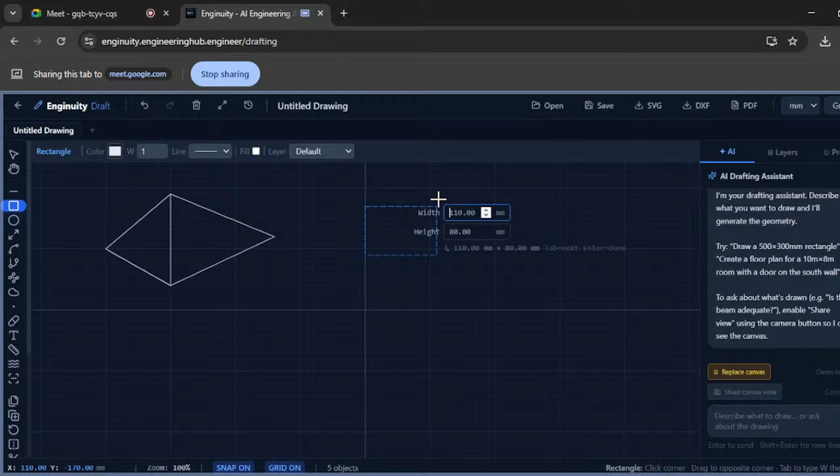This is the line tool in action. Okay, then let us try the rectangle tool. Then we can try the circle. Now, with this, you can come up with anything you want to draw. You can draw a column, a mechanical tool, anything that you want to draw.

Now, we are going to test the AI on this other side. Another thing, you can select a tool like this, and then come to the props on this other side, and under the props, you'll get the rectangle properties. Props just means properties, and you can change them.

You can change the color. You can do a hatch fill for the rectangle. As you can see, we have diagonal lines. You can do a cross hatch, or some dots, or just concrete. You can change the spacing, everything. So this is the props.

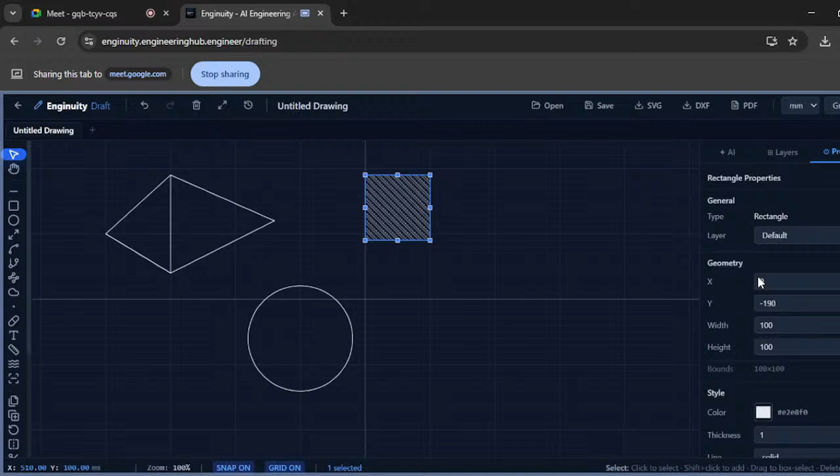And then you can draw based on layers. Whatever I've drawn so far was drawn under the default layer. Now you can switch to the construction layer and draw something. Let me draw this now under the construction layer. Then I can come and hide the default layer, and now they are hidden. So I have only the construction layer being shown.

Now I make the default layer visible and they are back, and then I can make the construction layer hidden.

And now you have your default layer. Now let us try the AI. We are going to draw, say, just draw a column and label it. That is okay.

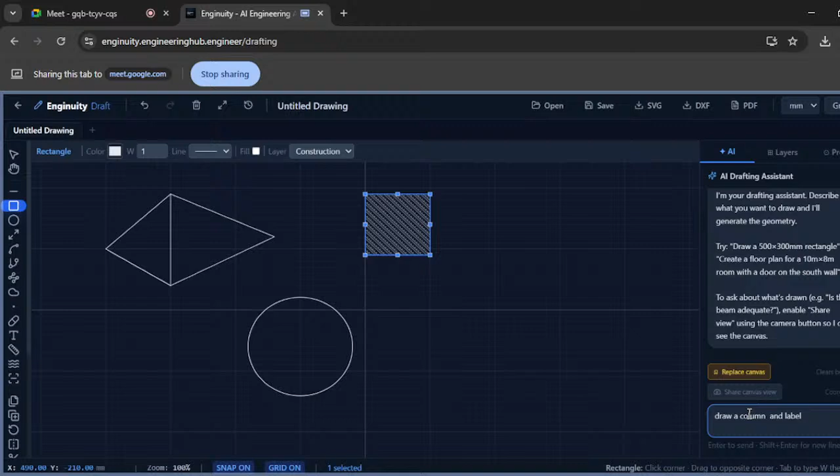Now, as it does that, you can save your projects. Here you can change the name for the project.

You can create another drawing tab. You can open a JSON drawing file. You can also export as a DXF, or as a PDF. We'll be seeing that in just a minute.

Let the AI do something. So this is Enginuity Draft. Basically, you can draft on the web right now with the help of AI. It's quicker, faster, and I can say it's smarter, because whatever you've drawn on the canvas, the AI has context of it. Now you can see if I toggle this share canvas view, you can ask the AI a question rather than telling it to draw.

It would have told me, say I drew a column here, it can analyze the column based on the information you've filled on it. Say you drew a mechanical tool, anything — it can analyze with you and tell you what you've drawn on the canvas. So yeah, the AI has canvas context and it can also draw.

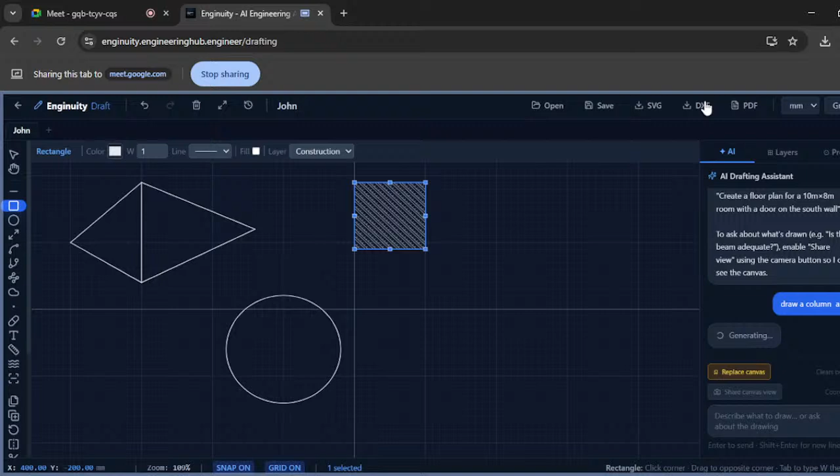Now, for export as a PDF, when you click export as PDF, you come here and you can write your project name, say John. I don't know if you can see — drawn by John, checked by John. You can also upload a logo. Let us upload a logo, which will basically be a tool.

Now, when I click export as PDF, we can check what has been exported. You'll see that the logo is here, the project title, and every other thing, and the drawing that we had has been exported. So basically, that is Enginuity Draft for you.

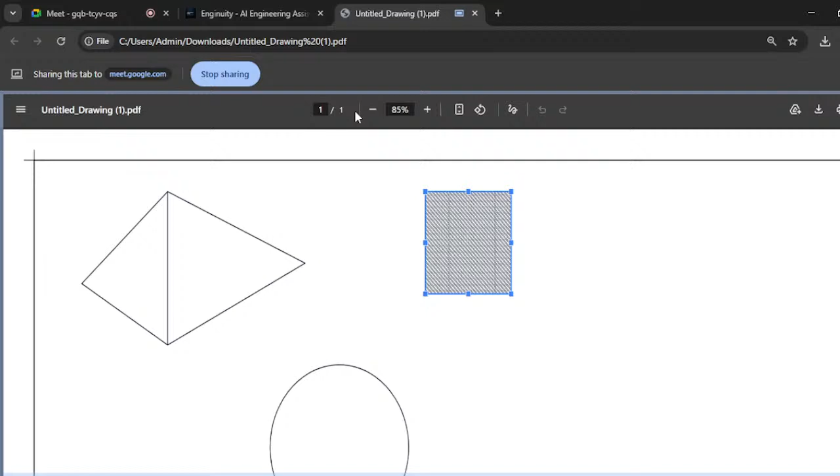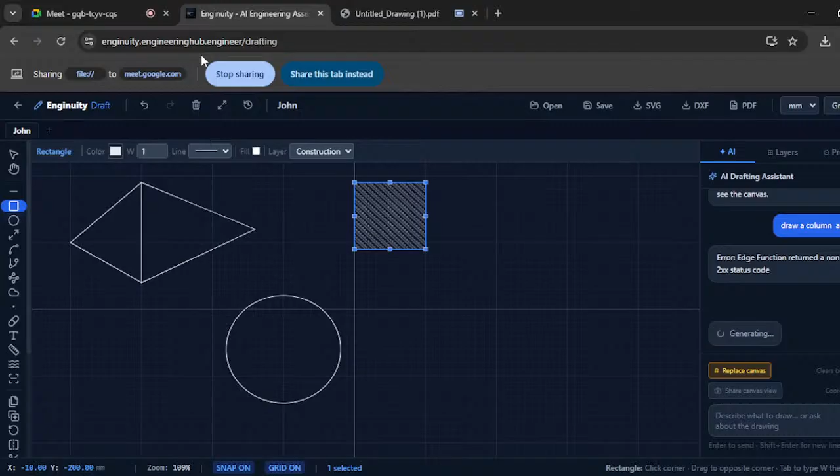Thank you, Michael. Now let me share my screen. Just a minute.

Okay, so the quickest way to access the TrussLab is to head over to Engineering Hub by typing in engineeringhub.engineer on your search engine. Then you head over to the learning part and click on design materials, then scroll downwards to the truss analysis tool.

Now, apart from reinforced concrete and steel, the other most common aspect of building is truss and frames, which are very difficult to analyze and visualize. So the concept idea came about when we were designing a modular bridge that was supposed to showcase the real picture of a standard bridge in Philadelphia. The concept was that the time it takes to analyze and come up with the frames and trusses is a lot of time.

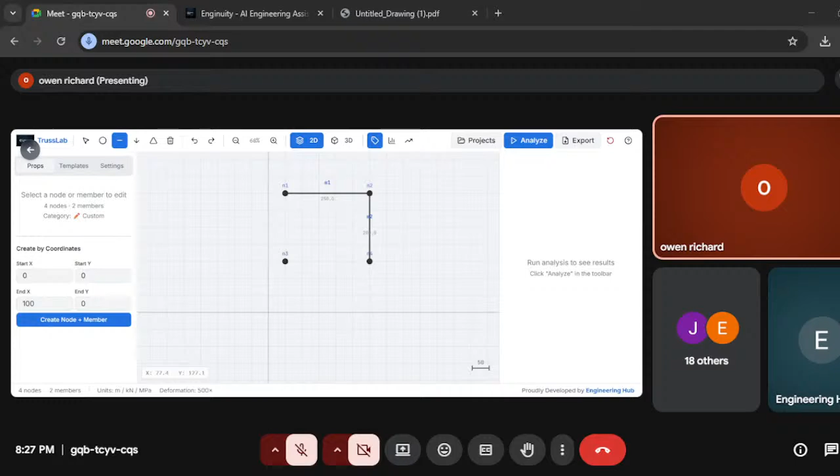The easier feature you can see is that it denotes the naming by following the process. You know that supports can exist in majorly three ways. They can be fixed, they can be pinned, and they can be roller supports. So to cater for this, you'll select the support and change it, if you want a roller support or a fixed support. So I'll use a roller support and a pinned support.

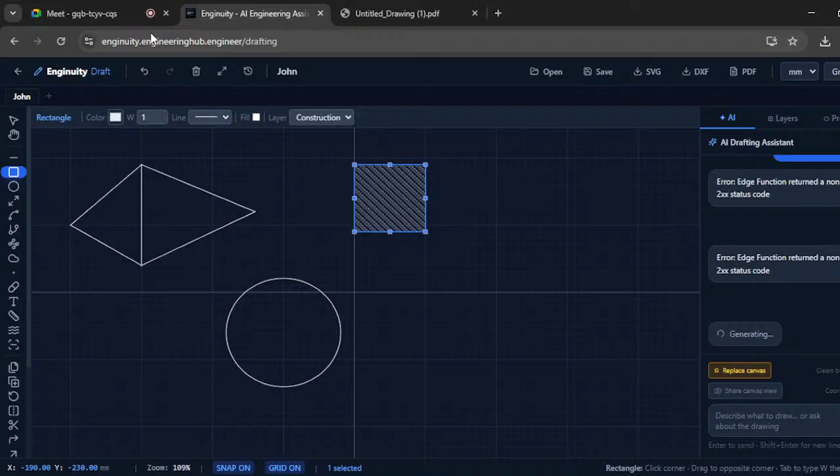Then I'll add my load. In analysis of trusses, we know that loads are added to the nodes, helping in calculation. So I'll apply the load. From the load, you can specify if it is a wind load from the side, a live load from the top, or seismic loads. So I'll use the dead load in my analysis. Let us change the direction of the loading.

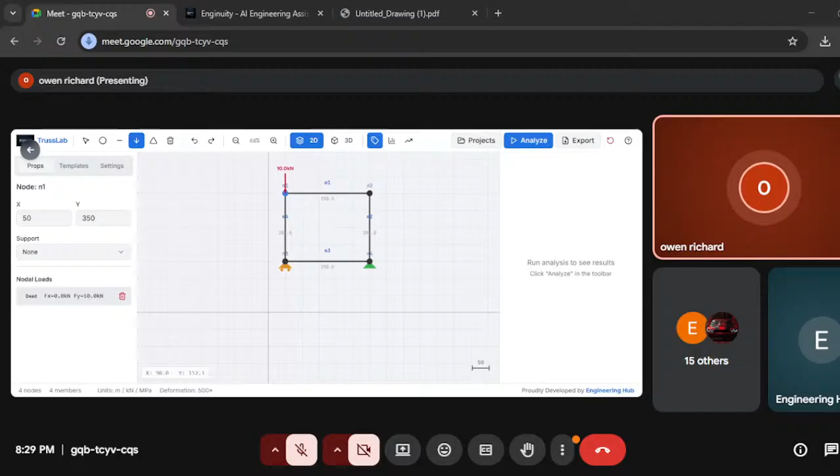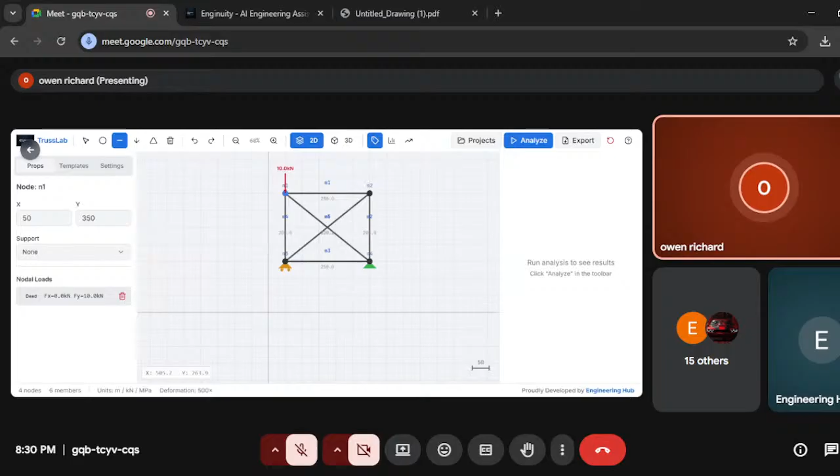So I'll add. Now you can see the load, and because a system without triangular members is not a stable system, we'll add diagonals. After adding the diagonal members, we have basically created a basic form of a truss. And after doing that, you can click on Analyze.

Now, from the output, you can see that it is capable of notifying the number of members, the number of reactions, the number of joints, and proving if the structure is determinate or indeterminate. The status is indeterminate. You can see the maximum tension, the maximum compression, and the member utilization, member 4. Member 4, from the naming, is this member where the loading is applied, a compression member.

And you can see the internal force diagrams. You can also see the deflection from the diagram. You can visualize the analysis of the deflection, how it will bend and how it will react depending on the supports, which are the roller support and the pin support, and the loading from node 1. You can remove the tags to have a clean output. So that is basically a simple model of a truss.

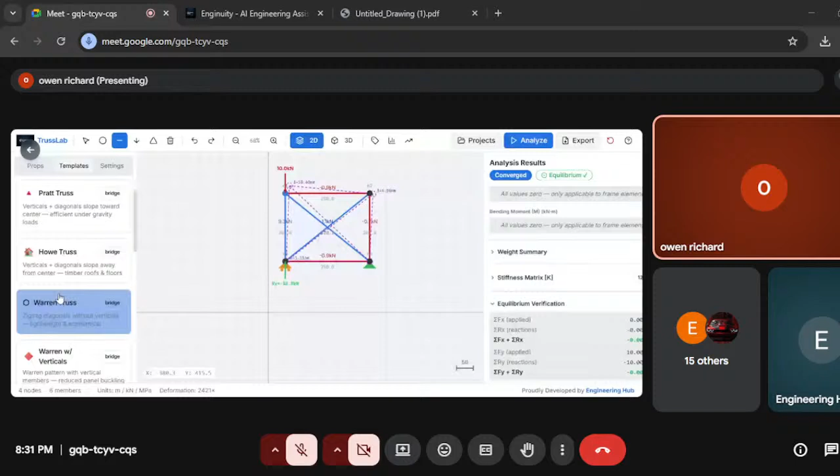And to help with this, we have templates of all the major trusses that exist. This is a Pratt truss, a Howe truss, a Warren truss, and Warren with verticals. You can also have a 3D visualization for this and view the members. So the next thing is we'll utilize the templates and see the analysis for this.

Another thing I didn't mention is that it uses basically all the forms of analysis of trusses to analyze the members. It uses the method of joints, the method of sections, and the matrix method. And you can see this from the output. So I'm encouraging you to go and test it out after this, and you'll see.

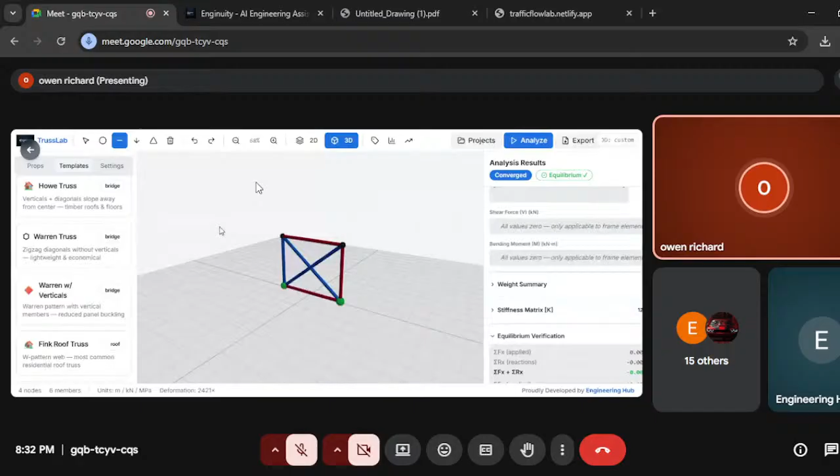So this is a Howe truss with declining members on the opposite side. You can see the 3D visualization. If you want to analyze it, you can head over to the 2D. And if you want to change the supports, we'll just toggle on the support and change it out. Another thing we have is the frames.

So you can see. Yeah, so from that you can see that it can analyze trusses and frames in a quick and visual way.

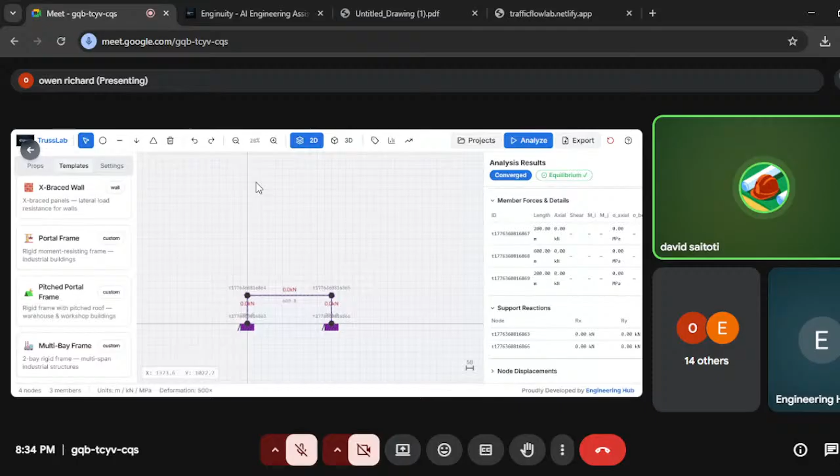David? Oh, hello. I have a question. Okay, you have said you can only apply the loads at the node. So how about a UDL? And then the second question is about the analysis. I saw you can add these different types of loads, like the wind and the seismic kind of loadings. So is it something that is based on, maybe, a specific design standard, or let's say a reference like Eurocode or American Standard, or how does it work?

Okay, so thank you, David, for the question. So all our features on Engineering Hub follow the basic codes that we use in Kenya. That is the British Standard, and another code is the Eurocode. But for this, we utilize the British, the BS code. Yeah, and for the loads, you can add any type of load. The only thing remaining is you trying it out and giving us your thumbs up. Okay, David?

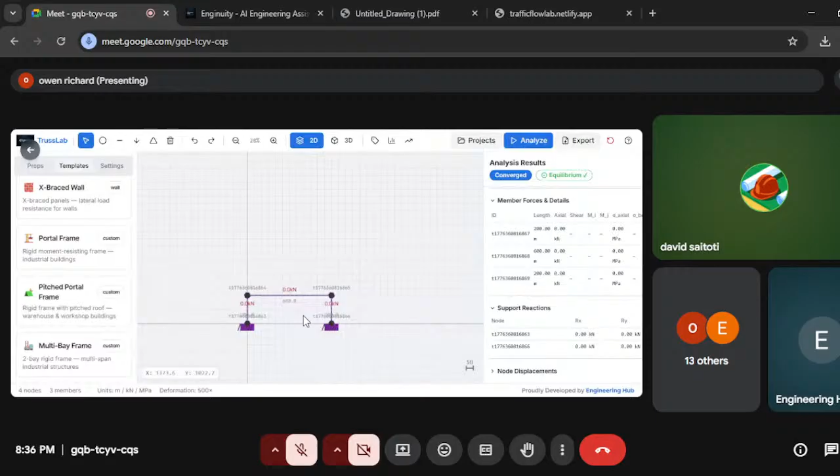Okay, thank you. How about the UDL? Yeah, you can add the UDL. Let me, just a minute. You can add the UDL, but you know that in analysis of trusses, even if there's a UDL, we first need to convert the UDL to a point load. Then using the point load, so that is why we have utilized the point load. So the UDL is, in that concept, basically a point load, okay? When you utilize the method of joints.

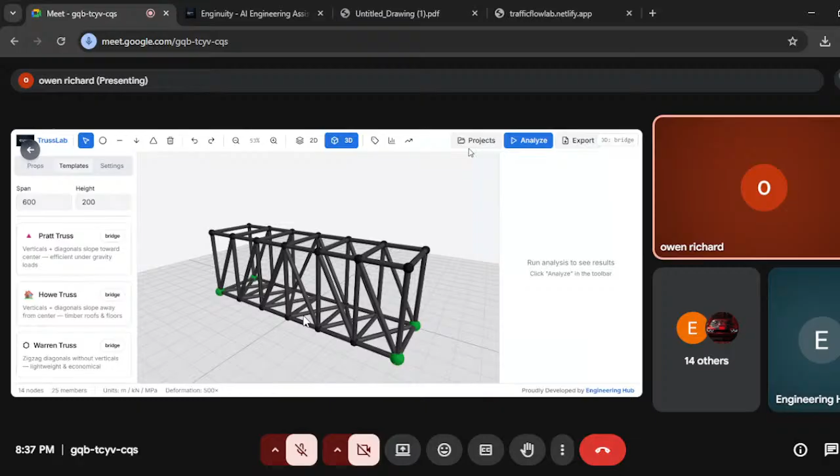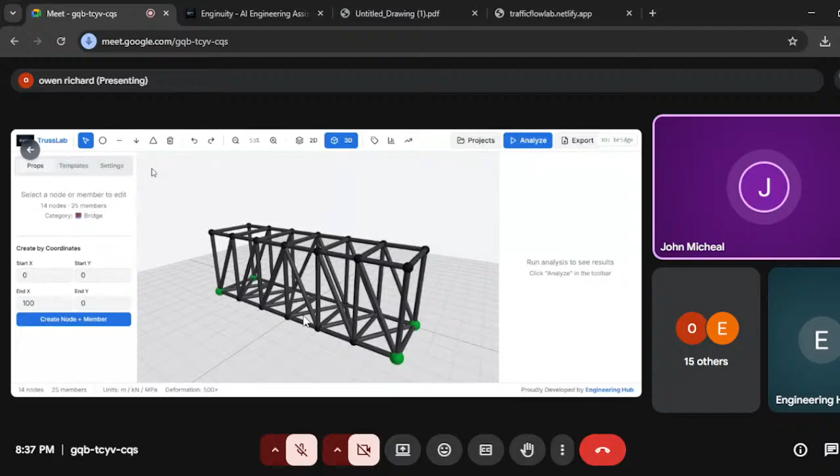Okay, thank you, Owen. For the UDL, you can just click on the load tool there, and then you'll be able to add either a UDL or a point load. So first of all, you select a member on the truss. Like when you want to add a load, you click on a node. So you click on a member, and then when you click on add load, it will show UDL as an option, because basically you cannot add a UDL on a point or on a node. I hope that answers David. You can just test it out, it's there.

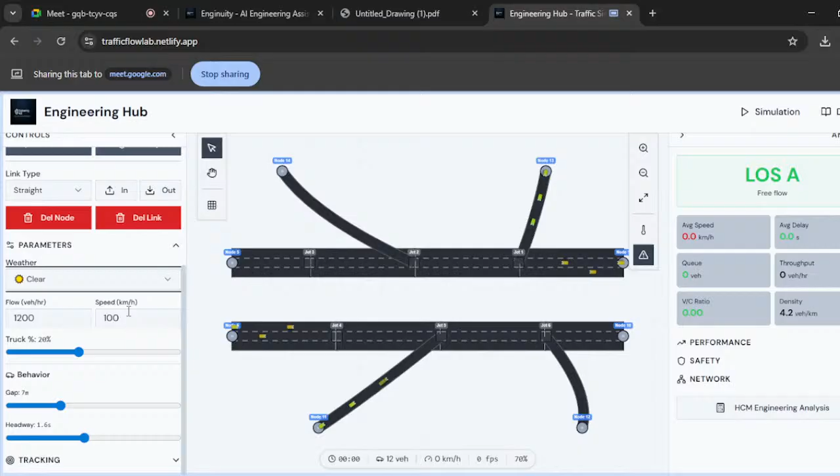And then we have parameters here, like we can change the weather from clear to rain to fog to night. And this reduces speed by either 15% for rain, 30% for fog, etc. You can change the flow and the speed of the vehicles, and you can change the percentage of trucks, the gap behavior, the headway, etc. And on the right side, we have the analysis. Now the analysis, the first thing that it normally shows is just the level of service, the average speed, and this, but you